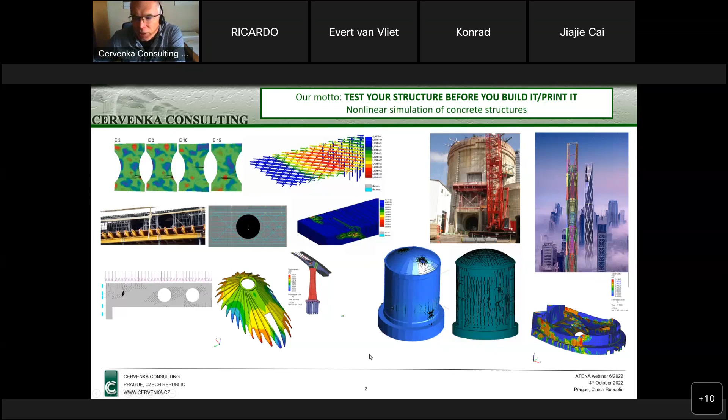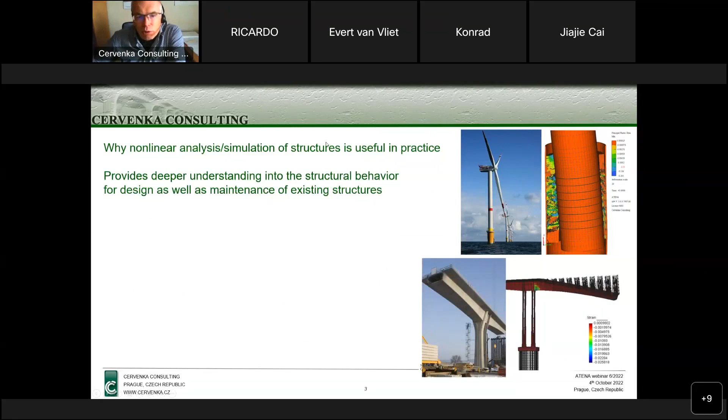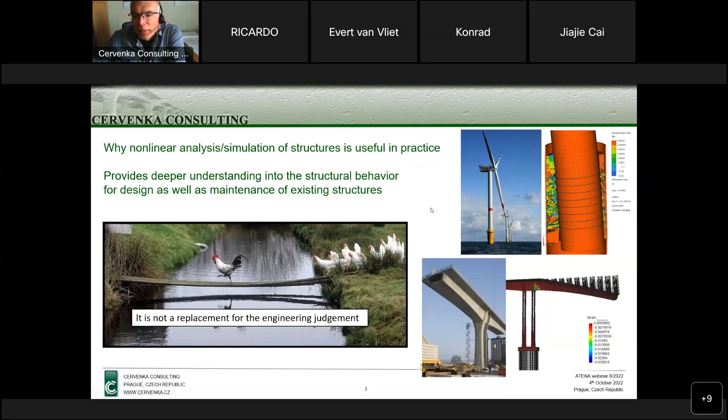So why do we think nonlinear analysis or nonlinear simulation of structures is useful in practice? Well, it can provide a deeper understanding into the structural behavior for design, but it is also important for the maintenance of existing structures. And of course, we should understand that it is not a replacement for engineering judgment or expert judgment, which is still an important part of any engineering work.

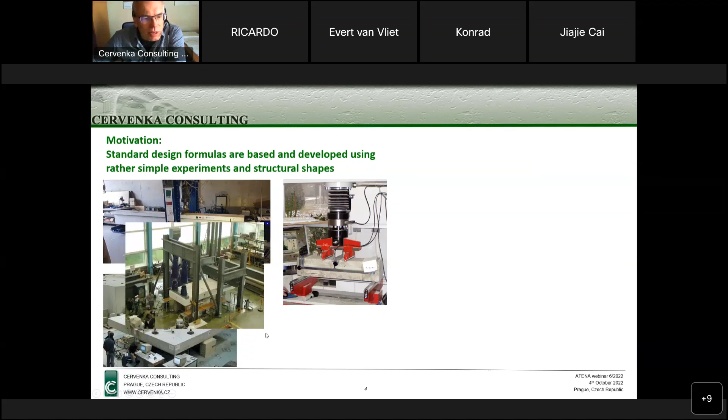But if I describe a little bit the motivation why nonlinear analysis is useful, we can look at where our knowledge comes from. All our formulas that we are using are typically based, very often empirically, on experiments which are usually small experiments that can fit into the laboratory. Of course, we try to simulate bigger structures, but still it is some experiment which is relatively small and quite nicely defined, but we want to apply it in practical cases.

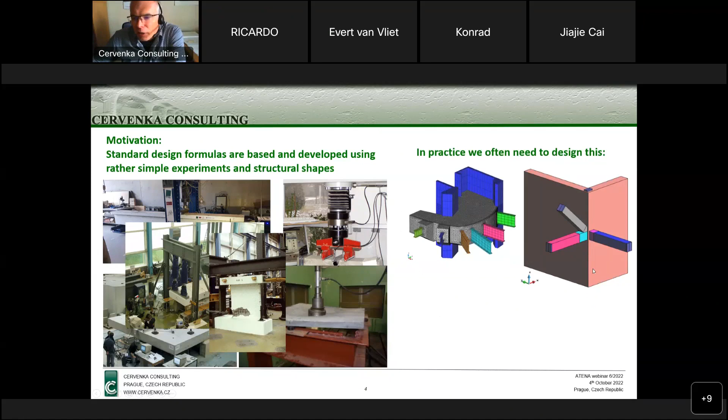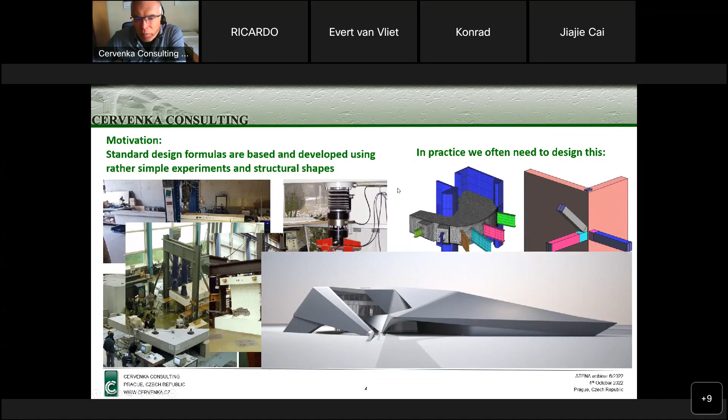And there you see very often the structures we are analyzing are not so clearly defined in terms of whether it is a beam or plate. Sometimes it is quite a combined situation, some parts embedded inside concrete like you see here, or we have very fancy architectural shapes where immediately all the formulas which work well for nicely defined situations like beams and shells do not work so well.

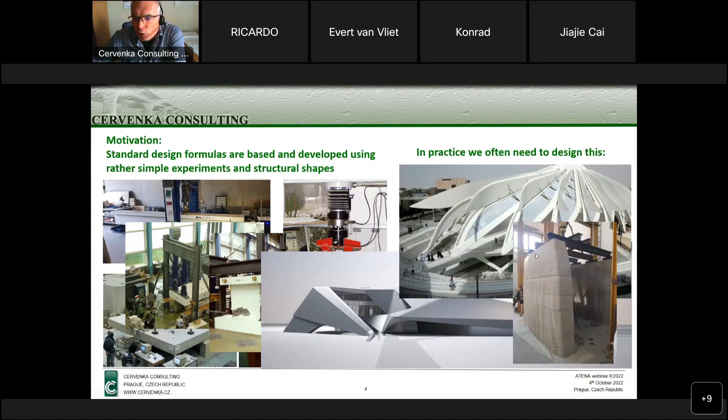Like you see this pavilion from Expo 2020. And nowadays we also have this new technology of 3D printing, where again the structures can have very complicated shapes. In addition, they are built layer by layer. So in these cases, also these traditional formulas are not easy to apply.

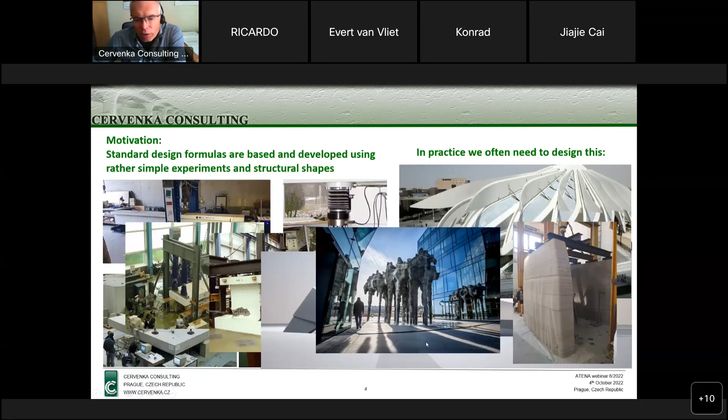And that's why nonlinear modeling is a good way to check and supplement our traditional methods. So our software is based on the finite element method.

If I briefly summarize what it is about, basically we divide our structure into finite elements, and inside each finite element we have integration points where we evaluate the stresses. These stresses are normally calculated from strains just by elastic predictor. But in reality, we can have cracks that develop, or concrete crushing, or reinforcement yielding. So we have this corrector phase.

So if we look at the response of the structure, we always divide our loading into steps. The first part is always a predictor where we assume more or less elastic behavior. And then we have this corrector. So it is an iterative process, and we need to satisfy the equilibrium.

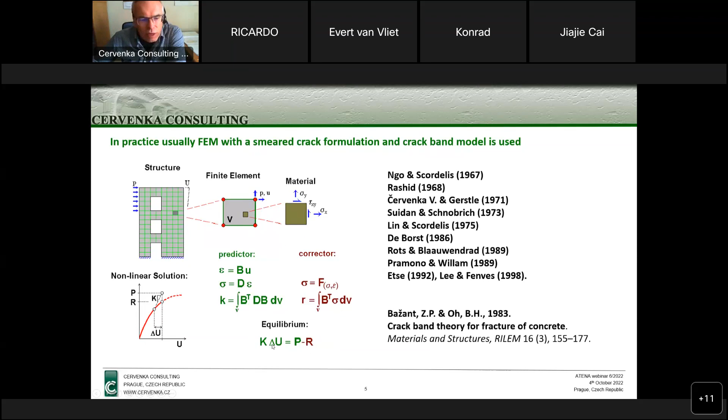Very briefly about the models that we are using: we use this fracture-plastic material model, which is based on decomposition of strains into a plastic part and a fracturing part. For tension, we use this Rankine type of model with softening in tension, and the softening is based on the crack band method. A similar approach is used also in compression.

In compression, we use the plasticity-based model, which has a hardening part and a softening part. Again, to highlight, we use a fracture mechanics-based approach for the softening. That means we assume there will be some kind of crack band over which we can integrate the plastic strains to calculate, to evaluate the slope or the softening behavior.

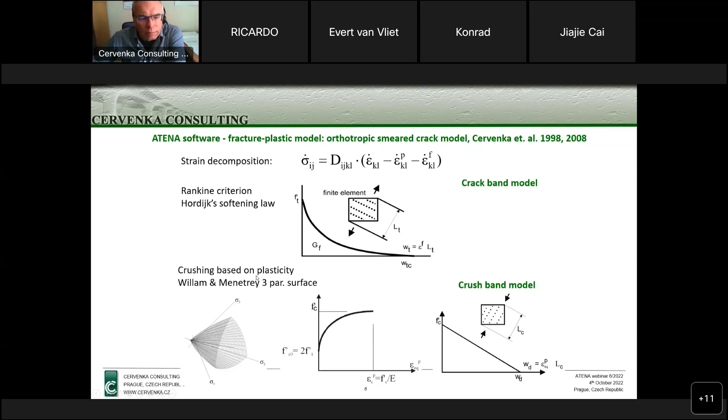Of course, we need to validate. I'm not going to spend too much time on this because I have already shown this many times. Those are some validation cases in history.

This is the famous Toronto beam. I'm showing it because I want now to show some newer results. This was the Toronto beam where we had a very nice prediction, and we were the winners of this competition. But last year there were two interesting competitions I want to mention.

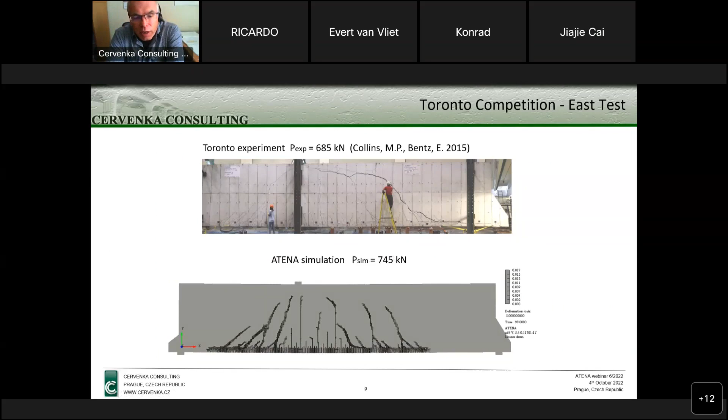Both of them were organized by University of California, Berkeley. The first one was a similar beam, like this Toronto beam, where you can see our predictions here. There were actually two tests: one without shear reinforcement and one with shear reinforcement. Our results here were very good, and as you can see, we were in this 10% zone - they call it the zone of fame.

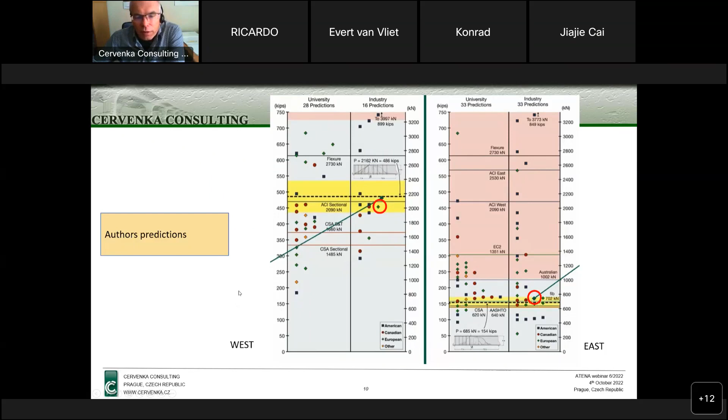But we understand that actually there is quite some luck involved, because to predict the concrete behavior in less than 10% accuracy is quite difficult. Let me then go to these newer experiments, these newer blind competitions. I will spend a little bit more time here.

And here you see the results. On the left is the lower strength indicated by this green line, which shows the results from the experiment of the unreinforced part, and on the right you have the results for the reinforced part. You can see our results this time - we quite under-predicted the strength.

Let me talk about it a little bit, so that I don't show only successes, but can also show some problems. It is not easy to predict these behaviors of these beams. If we look first at this unreinforced case, you can see that we are, let's say, 25% below, which would look very bad.

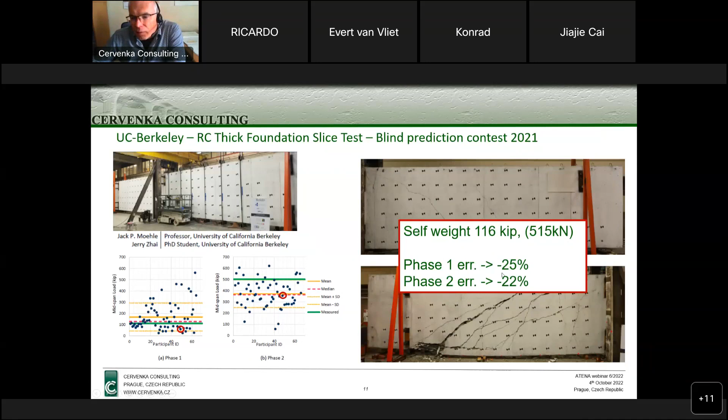This time it was a little bit higher, and the main reason was that - I'm comparing here the Toronto 2015, where our predictions were good, with these Berkeley situations where our predictions were not so good. One reason for that was the shrinkage.

We thought when we started this modeling that we should really have a very low strength, so we introduced the shrinkage into this. We estimated what kind of shrinkage would be in this beam. Of course, we were not really sure about the exact age of the loading, but this was the main reason why we so much under-predicted.

So, for instance, you can see this - this is the experiment, the dotted line. The lower one is here. And if we use the default Atena settings, without any adjustment of material parameters, we would come up somewhere here - already close to this 10% accuracy I was mentioning.

But of course, these default parameters would be without any shrinkage considered. If we then adjust some parameters, we can obtain a perfect match. But this is easy to do - once you know the results, you can always adjust something to have a good match. The important result from this was that the default parameters of Atena would have been better to use than trying to make some modeling adjustments that we did, unfortunately.

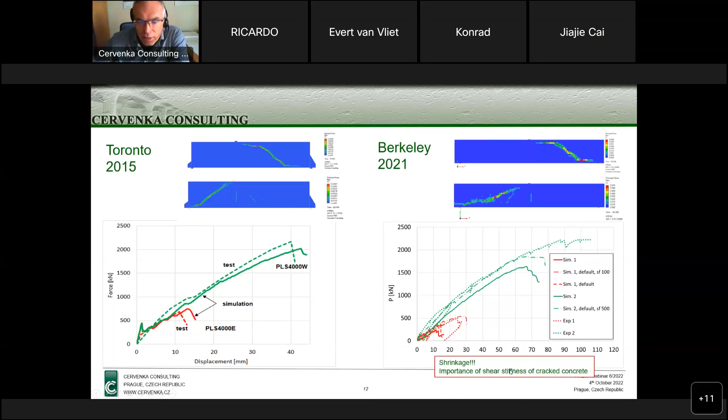What we learned from this was that shrinkage was not necessary to consider. To really have a good match, we should increase the shear stiffness of the cracked concrete. Of course, the shear properties of cracked concrete are quite unknown, there are no clear rules for that. So this is the freedom we have, or the uncertainty in material parameters in Atena, or basically in any modeling of concrete structures.

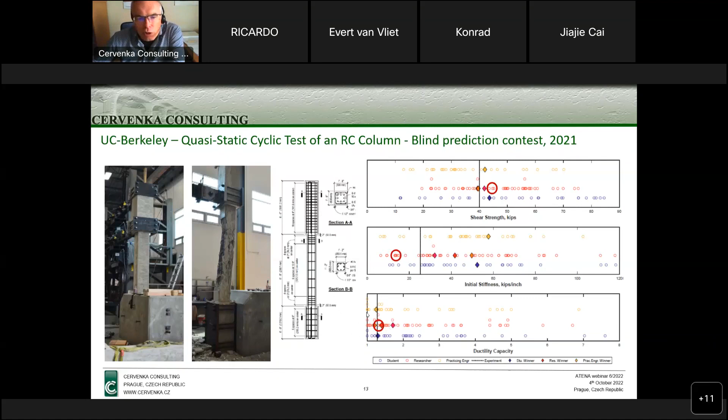On the other hand, many of the other results underpredicted or considered the structure more stiff. But we had a very good prediction of the ductility, which was important, one of the most important parameters for this column, since ductility matters for any seismic assessment. So our results were quite good, and Atena was actually used in one of the winning predictions in the student category.

Here is some animation of such an analysis in Atena. This was the analysis we actually submitted. You can see the opening and closing of the cracks, the cyclic response, compared with the experiment. As you can see, the initial stiffness was somehow higher, but I suspect there might have been some problems in the experiment, because otherwise it makes no sense why there should be any reduction in the initial stiffness, since everything is quite clear and clearly defined.

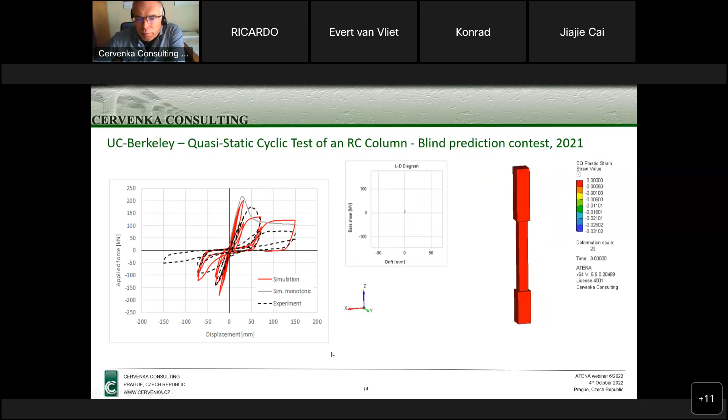This was, let's say, an introduction to Atena for those of you who are not so familiar with it, and I also thought it would be nice to discuss these new blind benchmark results. Now let me summarize our latest development.

We are now releasing, either the end of this week or the beginning of next week, the new version, Atena 5.9.1. I will describe its features later on.

We are also working on a new generation of Atena. So far it's an unofficial name, but we call it Atena 2023. You can see the view of its user interface on the top right. It is very similar to the window of Atena Engineering. For those of you who also use GiD, it is also similar to GiD, so for both these families of preprocessors, we try to take the best from both of them.

So it can be used to really model, as you are familiar with in Atena, quite complex structural behaviors like this bridge on the slide. You can consider each reinforcement arrangement, pre-stressing, and all of that. I will come back to show a little bit more from this new version later on.

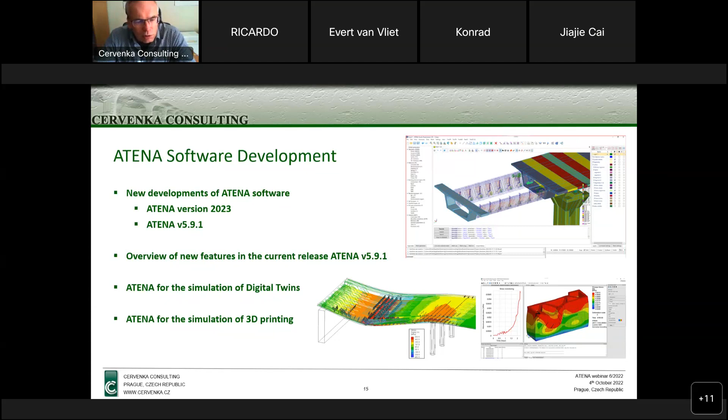I also want to spend a bit more time in my presentation today, because we continue very much developing the software. We are now using it, and I would like to show some examples of its application inside the digital twin approach, and also for the modeling of 3D printing of concrete.

Let me list the new features of the current release. I would say there are no major changes, since as I told you, we are preparing a major new version starting next year. So this release is a little bit of incremental improvements.

I would say the biggest or most interesting improvement for users would be some new licensing options, which allow temporal licenses or software licenses, so that you don't need to have a hard lock. Also, for new users there is a much easier trial version feature in this new program.

As far as functionality, there are some new creep models for ACI and Canadian code, and also some new models for bond, which can take into account aging or deterioration over time, or due to temperature and corrosion. That means the bond properties between reinforcement and concrete can degrade depending on temperature, which might be interesting for fire analysis, or because of corrosion.

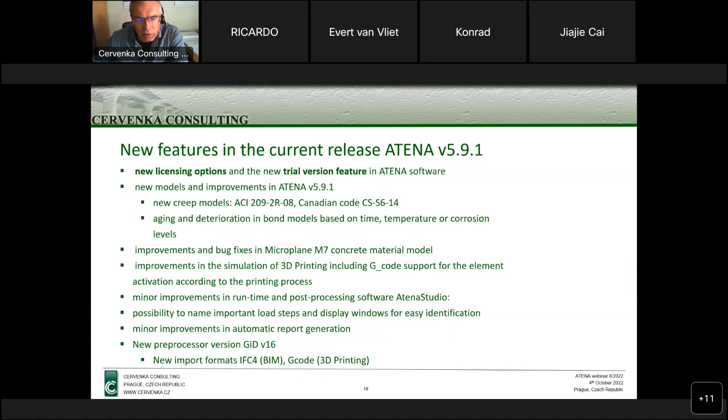Now I would like to talk about these concepts of mainly long-term behavior and durability modeling in Atena. And for that, I will use this digital twin concept, a new way how nonlinear simulation can be applied in practice, by combination or very close connection with monitoring.

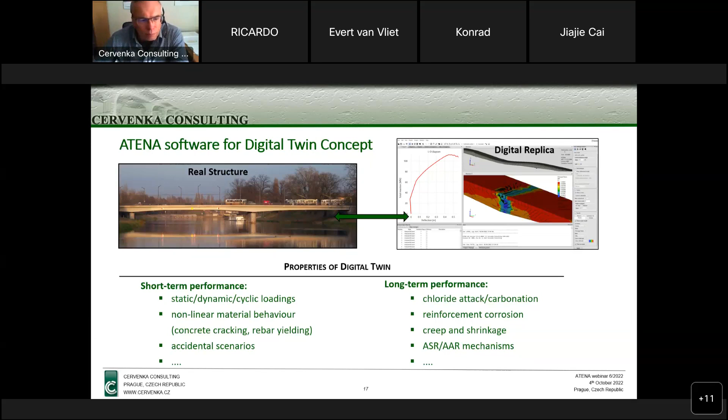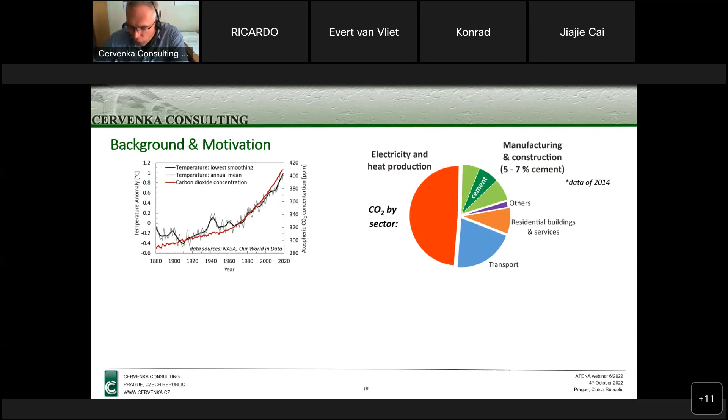So what is the motivation? Of course, there is some motivation to reduce CO2, as it is now very popular. But of course, the biggest motivation is to make sure that our structures are safe and reliable.

So when we model, I will show some examples of a bridge, which is a box girder bridge. There you have various effects which can affect its durability, because it is a bridge used by road, by cars, trucks and personal vehicles. There are some de-icing processes being used throughout the year.

So we have chlorides which may penetrate into the structure, and they can also leak inside through some insulation failures and problems, and then they can corrode the external tendons. So we have developed recently a model in Atena where we can simulate this corrosion.

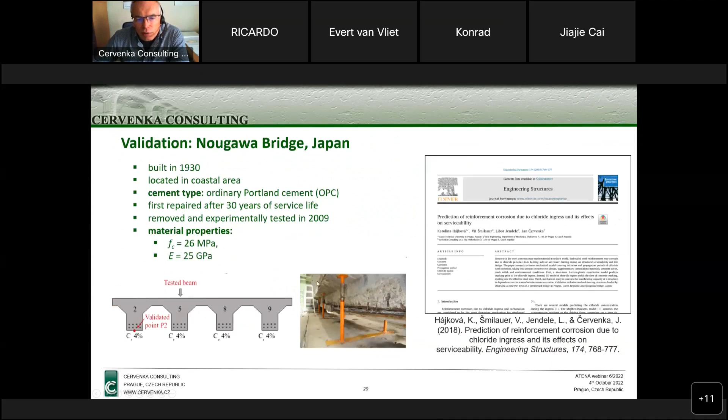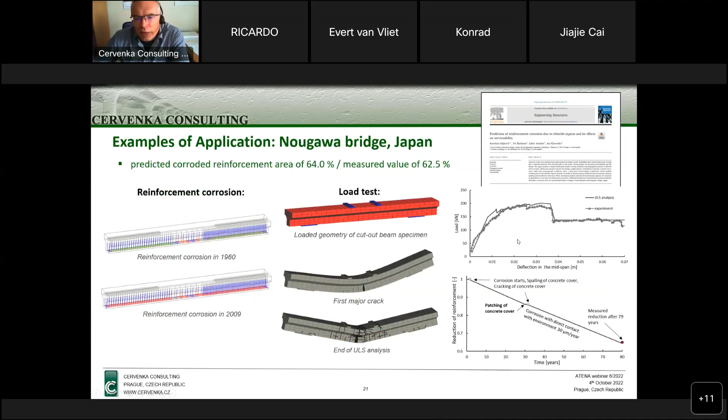Once the critical chloride concentration at the reinforcement depth is reached, we start to have corrosion of reinforcement. As the corrosion progresses, we have more and more corrosion. At some point, due to the expansion, we have cracking of the concrete cover, which again increases the corrosion. Then we have spalling, meaning the concrete cover is totally lost, which again increases the corrosion rate, and then we may have a collapse of the structure.

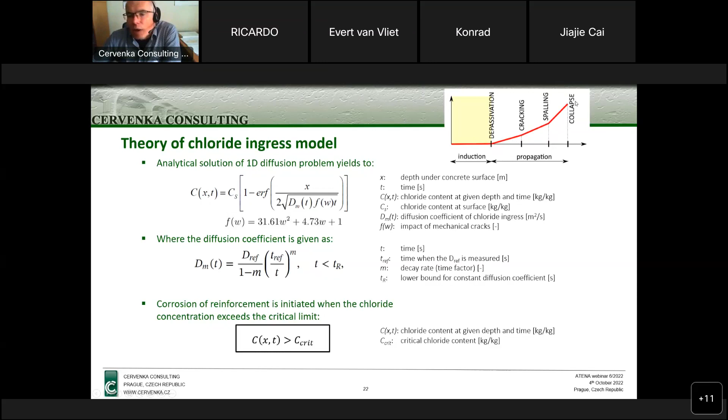So we simulate this. I have a better slide on this - where's that slide? Oh, here.

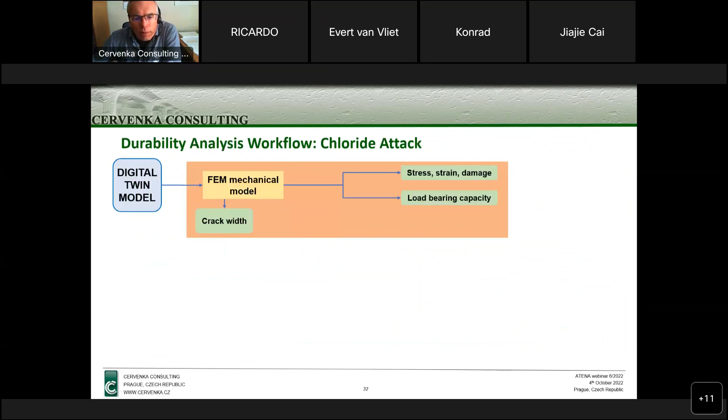So we simulate this by a combined model where we have a three-dimensional finite element model for the mechanical part, where we can calculate stress, strains, and damage, and out of that also obtain the crack width. Then we use a model to first simulate the chloride diffusion, and then the reinforcement corrosion. This is actually a one-dimensional model - we don't need a 3D model.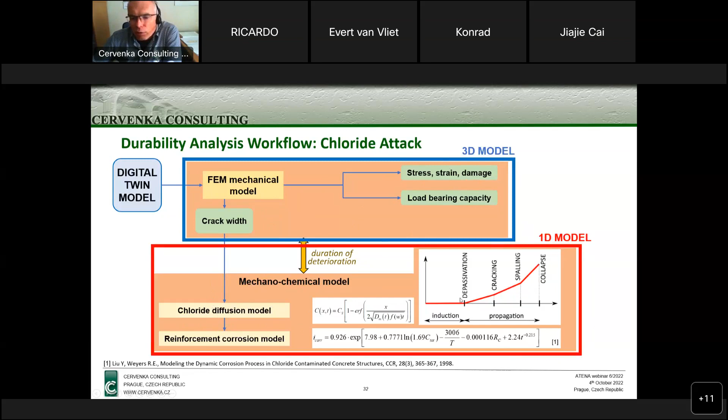I know some people model this part also by a complex 3D analysis, but if you think about the typical situation demonstrated on this figure, it is actually typically a 1D situation. We just need to know how fast the chlorides propagate from the closest surface to the reinforcement. Because in Atena we have the discrete model - one of the options for reinforcement modeling is this discrete model - we know for each reinforcement its distance from the loaded surface.

This means we can indeed use this one-dimensional model to model the diffusion of chlorides or carbonation. Once it reaches the reinforcement, the corrosion starts. This model also considers the presence of cracks. If there are cracks, the diffusion of chlorides was faster and the corrosion started earlier, indicated by these red zones, which show the amount of corrosion. So we can model quite effectively the corrosion rate of reinforcement, which reduces the cross-sectional reinforcement area, and this has an effect on load carrying capacity.

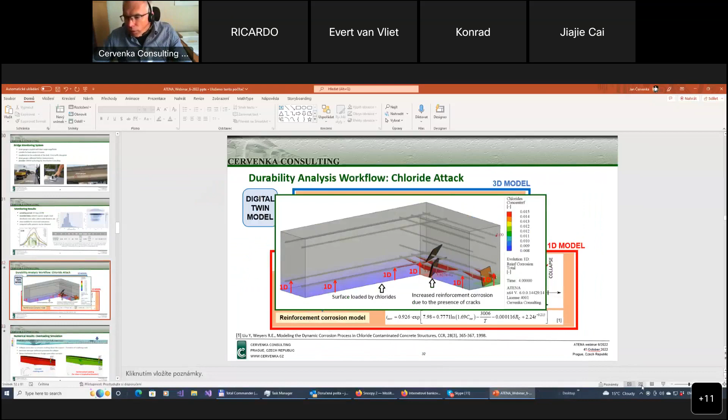Let me now go back to the presentation. Where was I? Yeah, I wanted to show you these two cases, two bridges.

We apply this concept to two bridges. One is a bridge in Czech Republic with pre-stressing tendons. Actually there are two types of pre-stressing: there are some bonded cables inside the walls, and then there are external unbonded tendons, as you can see here on this cross-sectional view of the bridge, which are inside the box girder.

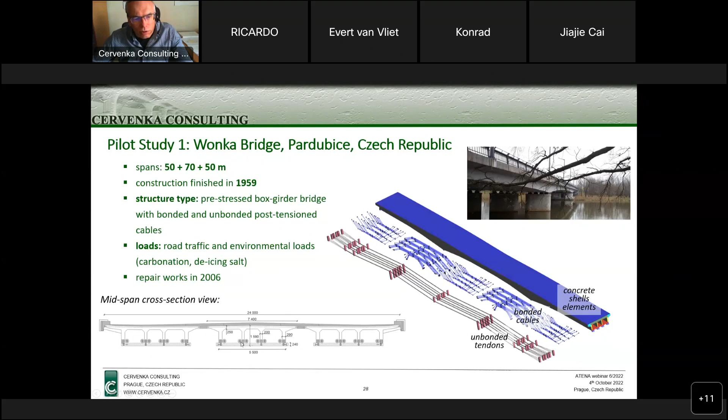And another bridge, this time it is only a reinforced concrete bridge, from Germany. I told you that it is combined with this monitoring.

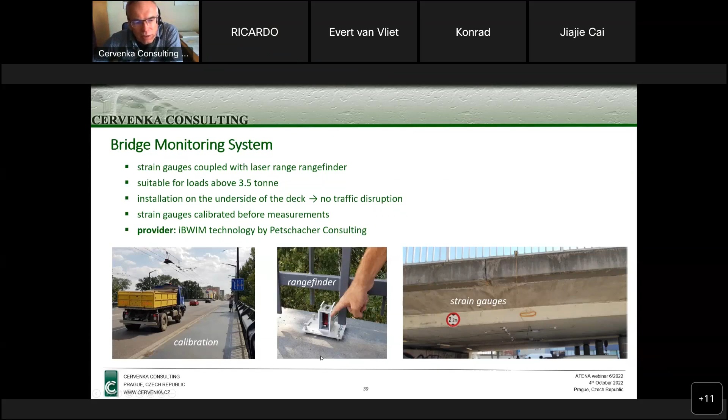We use an interesting monitoring system from Petschacher Consulting, which first needs to be calibrated by some trucks with predefined weight. It can then be applied on the bridge, and it consists not only of sensors like strain sensors, as you can see on the top right, but also range finders using a laser scanner, laser beam, which can track the number of passing vehicles and also track the number of axles and can be used to track vehicle speed and so on.

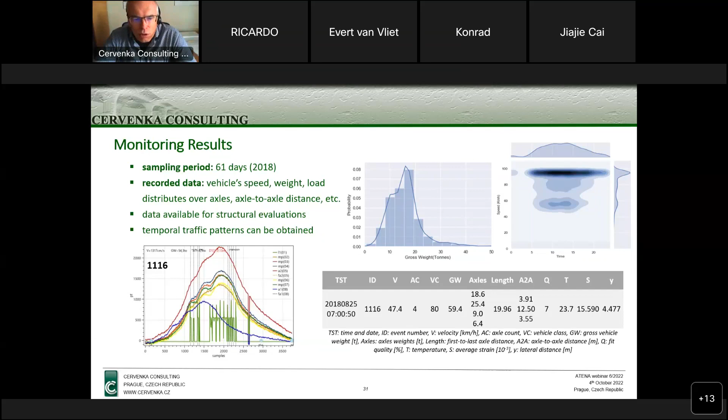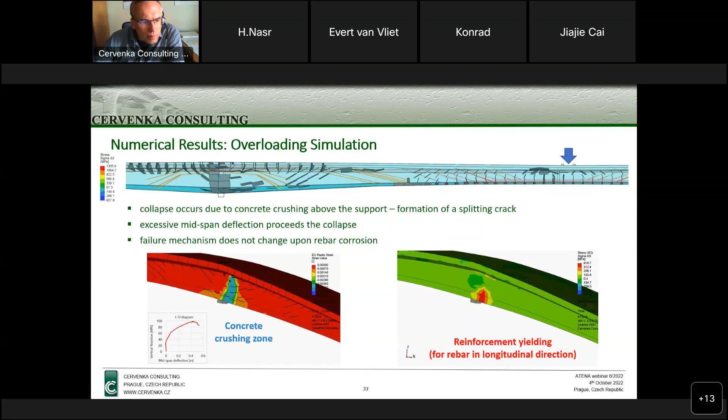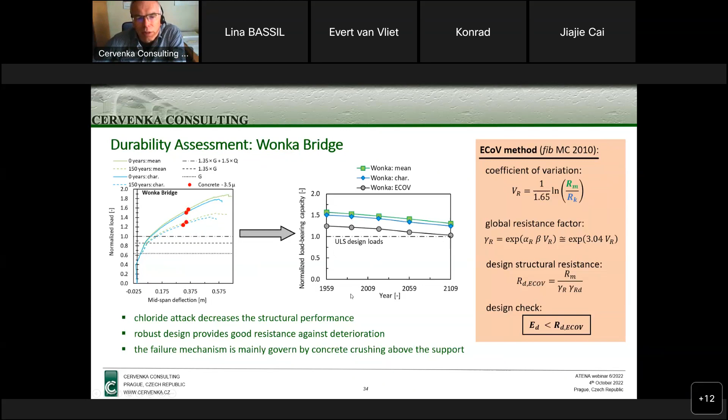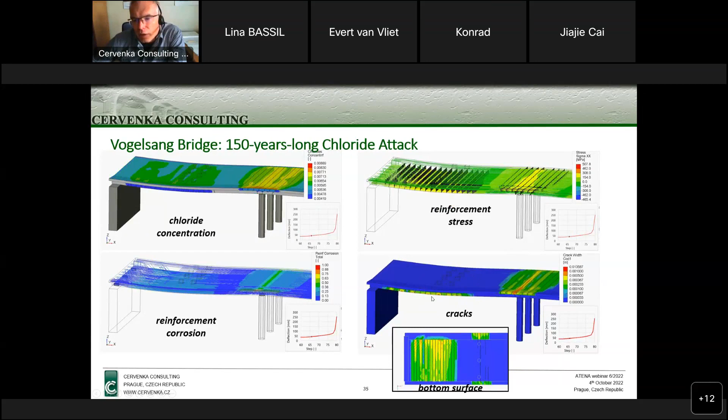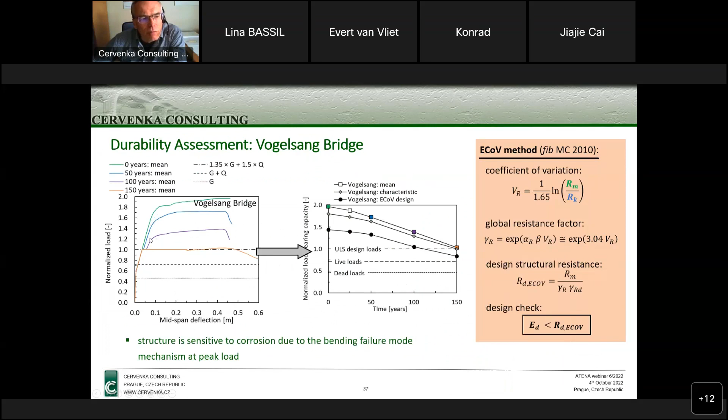So let me now go to this final picture. Again, for these two bridges, we can plot the evolution of their strength - at each time we consider overloading, kind of a virtual test, and we can detect the gradual degradation of strength of the bridge. It is interesting to see how both bridges have a different level of degradation. The one with pre-stressing, where the pre-stressing is quite protected from corrosion, the effect is not so pronounced as for the reinforced concrete bridge, which at some point starts to degrade quite rapidly.

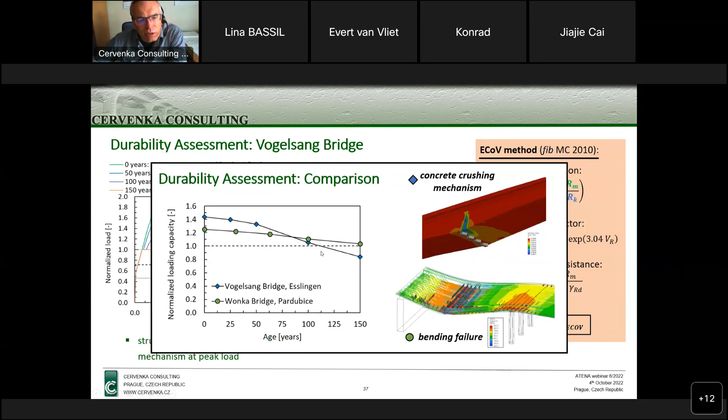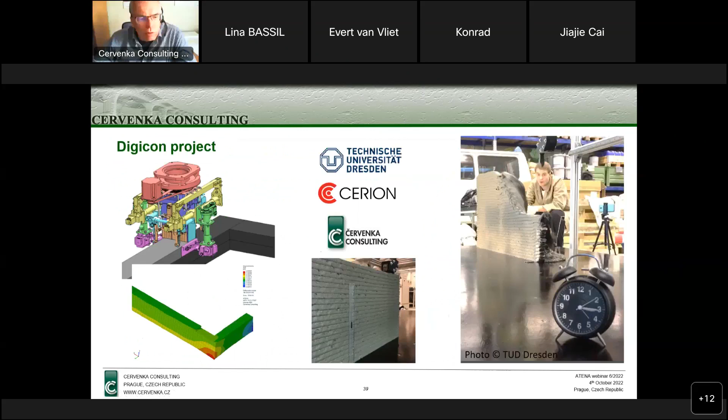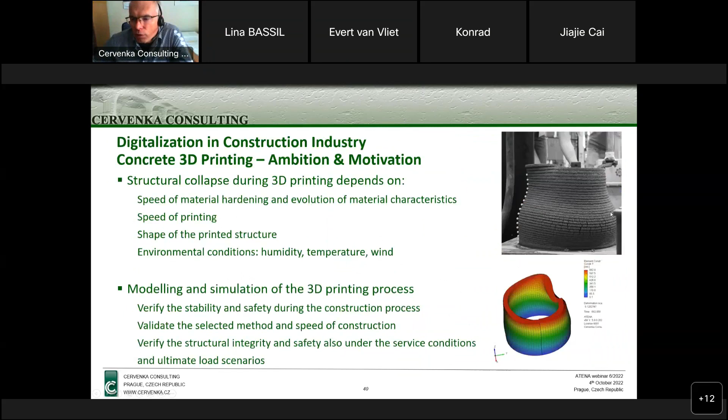Now let me go to this 3D printing - this is also a new development that we did in Atena, and it's quite a popular topic nowadays. One of the reasons simulation can be helpful for 3D printing is to prevent collapse of the structure, because depending on the printing speed and material properties, we may have a collapse of our structure even before the printing is completed, as you can see here on these photos.

And here are some results of the simulation. The material parameters must be time dependent, and you can simulate and predict whether there will be a collapse, and then the printing speed or the shape of the structure can be adjusted. Nowadays it is not such a big problem, because the structures we are printing are typically small - so if we have a collapse like this, they take it out and try another time. But once we start to use this technology for something more serious, this will be an important problem. That's why we are getting ready for that.

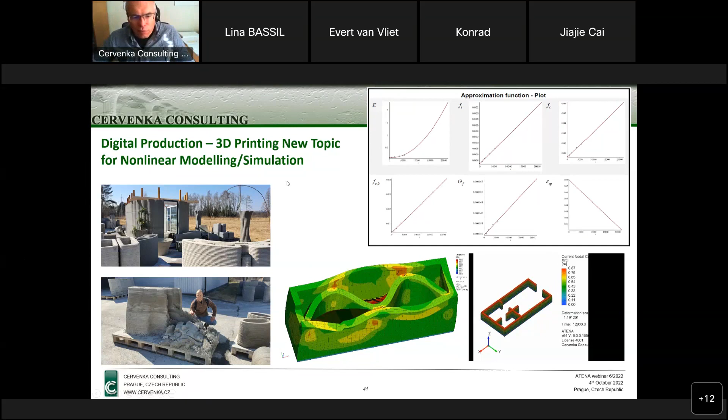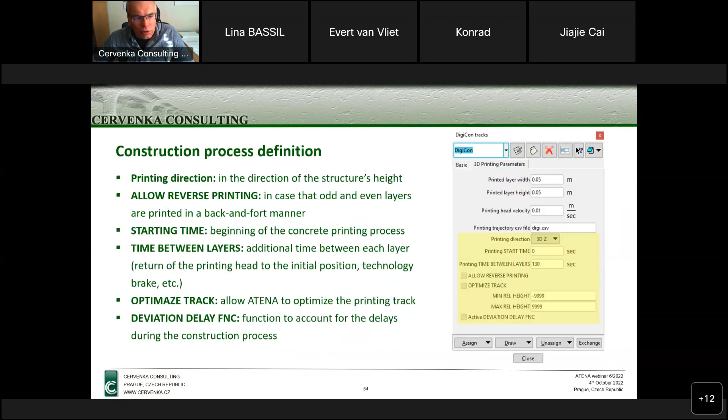So let me jump to the next topic because of the time. I want to show you at least a few slides from this latest version we are preparing. I want to emphasize this is not yet version 5.9.1, which will be released this week or next week. This is a totally new generation of Atena we are planning to release at the beginning of next year.

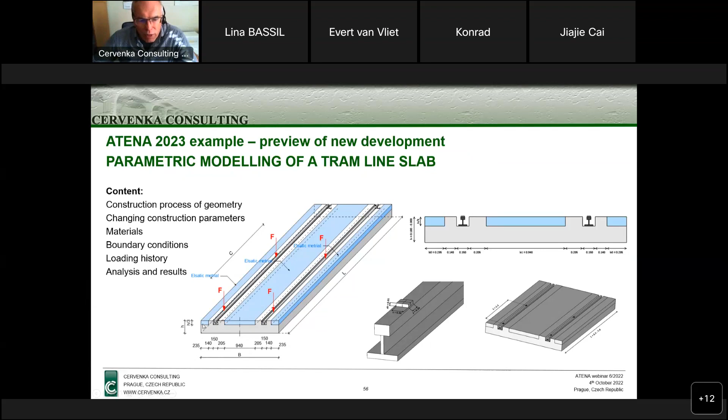I want to show one example, which is kind of a tram. This shows the modeling environment, very similar to what you are used to - you define it by points, then you connect the points to lines. But the new thing in Atena, something you probably will find very appealing, and actually it is quite common in other software nowadays, is that it will create a script file, a script definition in Python language.

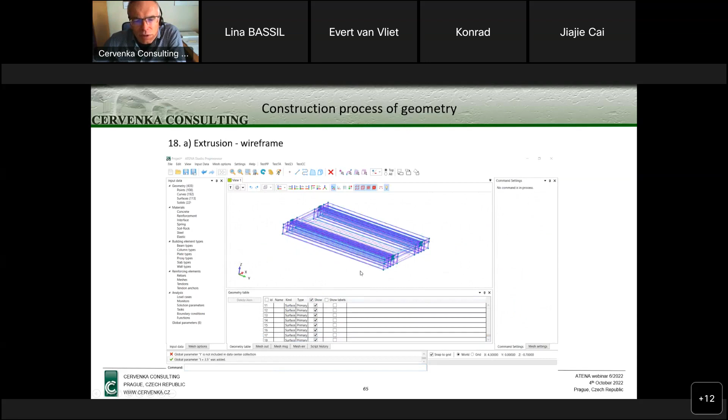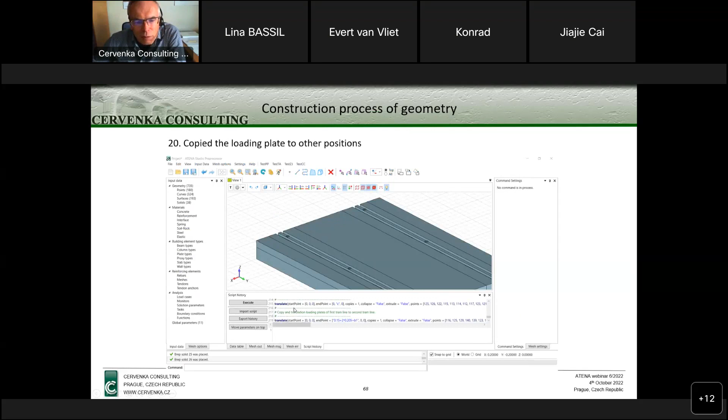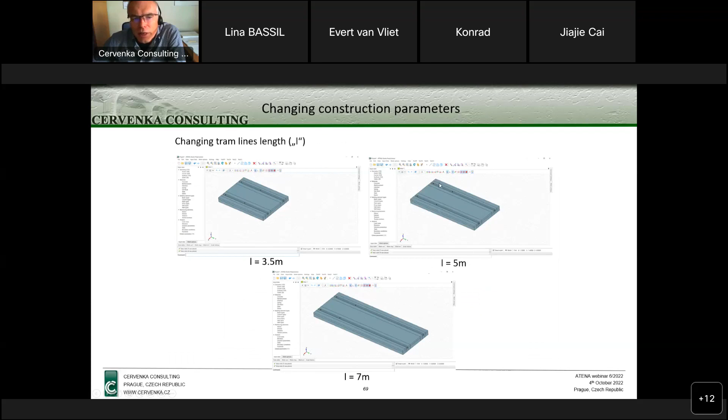So later on you can reuse that to make some parametric modeling, since the scripting is embedded directly into the program environment. Once you define the model, similar to the definition in GID, you define surfaces, then connect, then define the rail, and extrude, very similar to how you work in GID. You can define some kind of simple structure like this, and the interesting new feature is that you define this scripting language, which you can later reuse by changing parameters and generating various shapes of the structure.

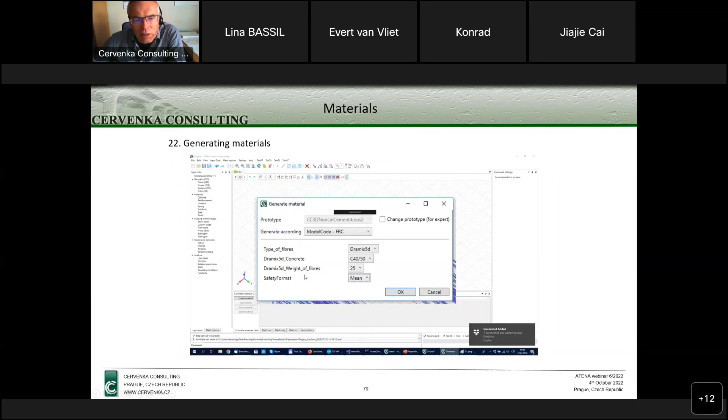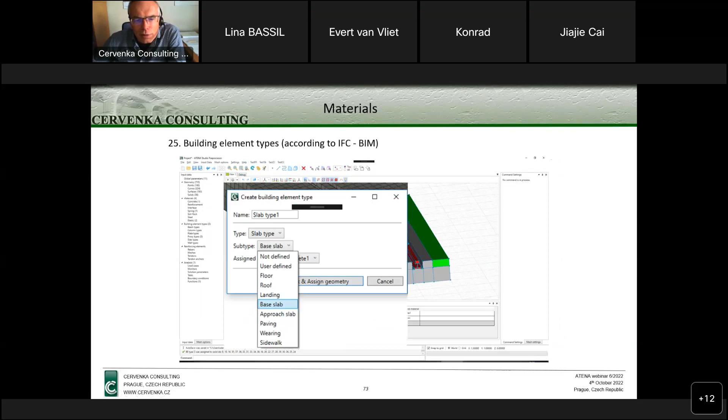And then, as you know already in Atena, we have nice definitions of materials with helpful tools, for instance here for fiber reinforced concrete. I think I will not go into details here, I just wanted to give you a very first glimpse of the new version we are preparing, and some of the new and interesting features.

Maybe one of the most interesting features is that it supports this scripting language. In addition, its data structure is really based on the BIM approach, following the IFC or ISO standard for the IFC model. So every time you define some part of the structure, you identify whether it is a beam or slab, which can then help in post-processing, model development, and definition of material parameters.

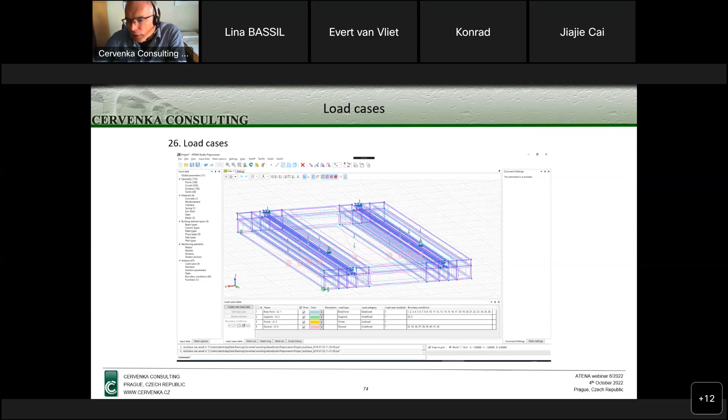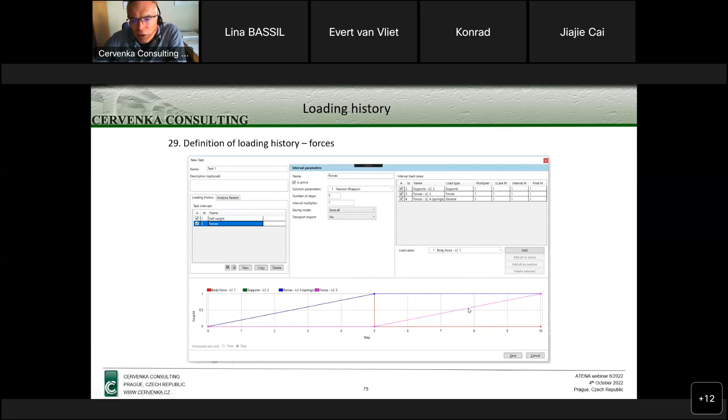So with this, I would like to... actually we still have some more time, so once you prepare the analysis, you define the loading history. There you can see the various loads and how they are applied. You can define the load combinations and easily follow how they are being applied. This is already what you know. Once everything is created, it prepares the input file, and this will be the same in the new version.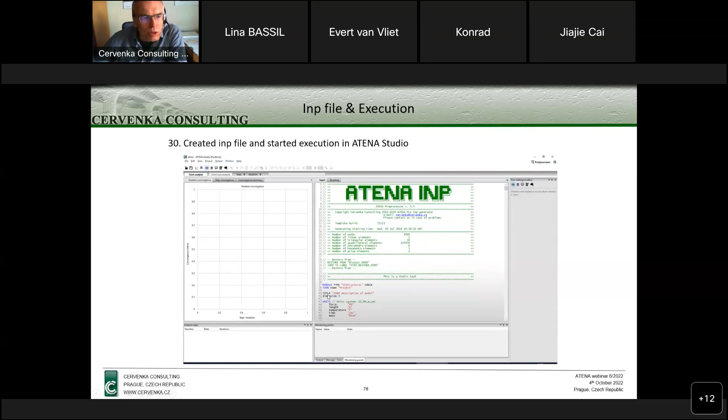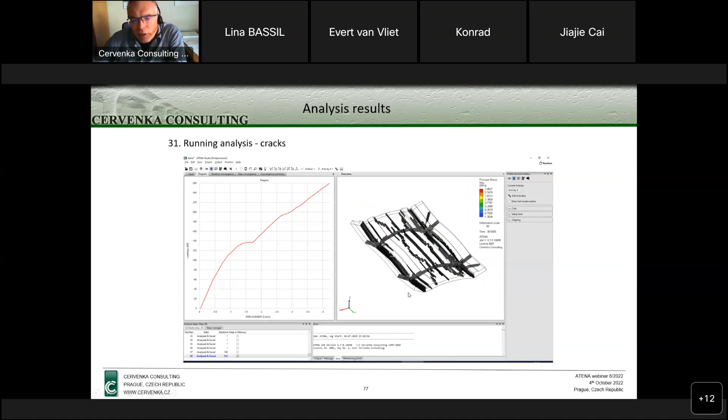You will use ATENA Studio to run the analysis, which you are familiar with. This time it is a slab supported on a flexible foundation, and then you can obtain some modeling and simulation of cracking and crack propagation. Here's some video from the analysis.

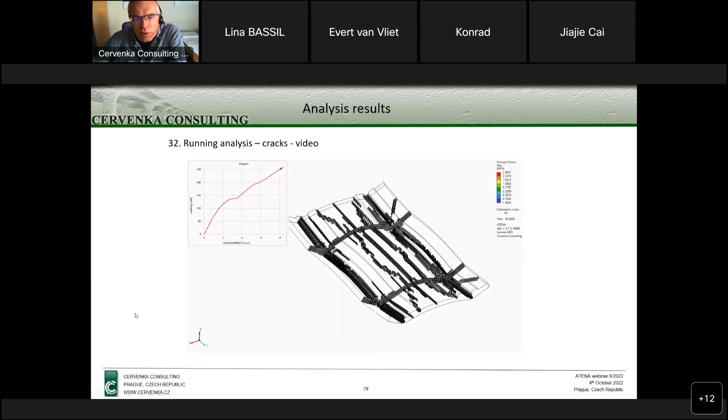So with this, I think I would like to conclude my presentation, and we still have some time for questions. So if there are any questions.

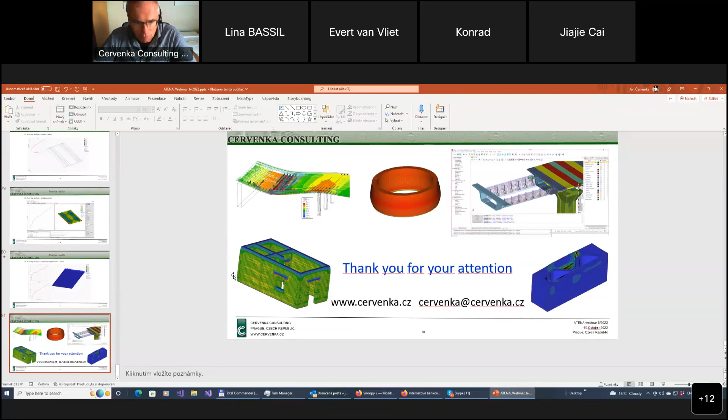I don't see there is any question, at least not for the time being. I see that we still have some time, so I'm thinking whether there is something interesting I can mention. But yes, if not, of course, if some questions come up later, please feel free to send them to us.

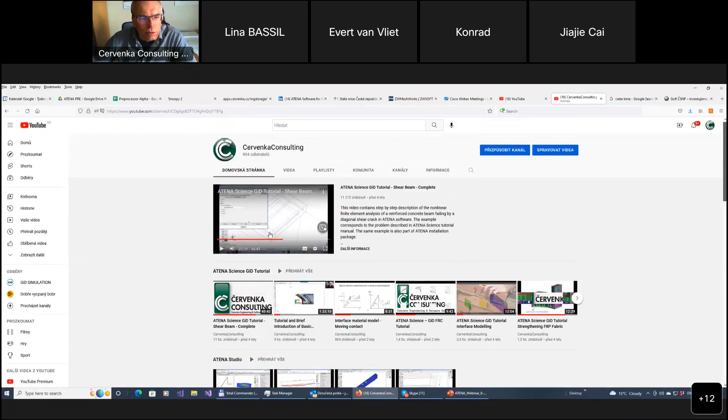Okay, so are there more questions? There is a question from Nigel Rees that he missed the part about the digital twin. Well, as I told you, I'm not sure whether we covered exactly the topic you are asking about, but we will provide you with the recording of this webinar so you can have a look and see the parts that you missed.

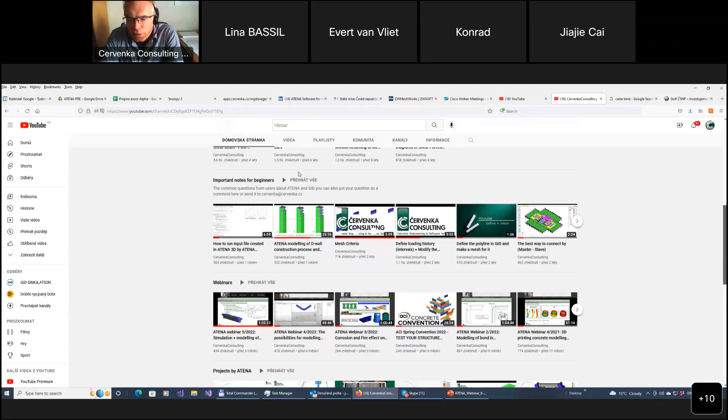Okay, there's a question about when version 5.9 will be available. Yes, the beta version will be available, as I told you, either this week or the beginning of next week. It is already ready, we tested it internally, and now we will release a public beta version. After about one month, there will be a full commercial version. So with this, thank you very much for your attention, and I will stop the recording.